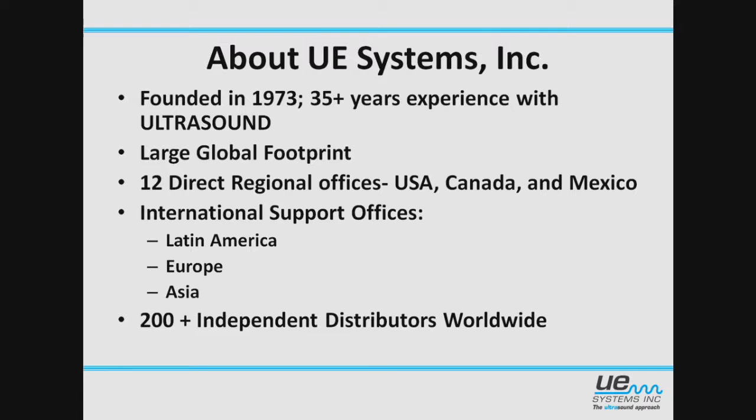A little bit about UE Systems first. We were founded back in 1973. We've got 35 years of experience with ultrasound, one of the tools we're going to go through today in testing steam traps. We've got a really large global footprint with 12 direct offices and about 200 independent distribution points around the world, so no matter where you're at, we can probably get out and help you with whatever it is you need.

A little bit about Swagelok Energy Advisors. They do engineering services, steam system audits, some project management, and they also offer an entire host of training programs.

What are we going to cover today? We're going to go through why steam, what are steam traps, what do they do, why do we even need to test them, and then how do we test them. That's the meat of it for today.

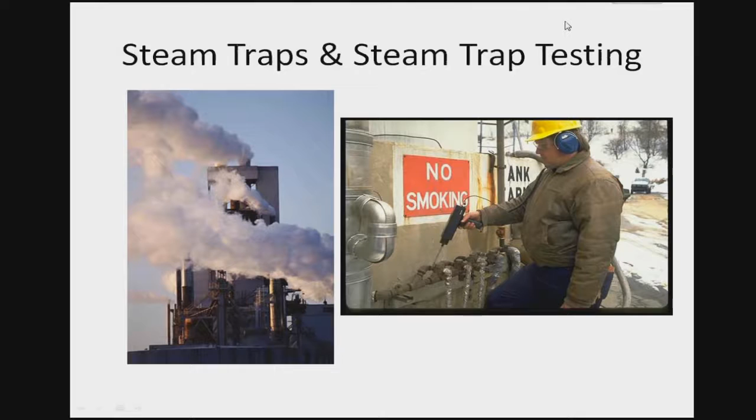So the first thing we want to focus on is why are we using steam traps in the first place. Well, steam traps have three main functions. The primary function is to remove condensate as quickly as it forms, and the second function is to prevent live steam loss. The third function of a steam trap, and it's kind of a tertiary function, not the main function, but it has to be able to do this, is remove air from the system.

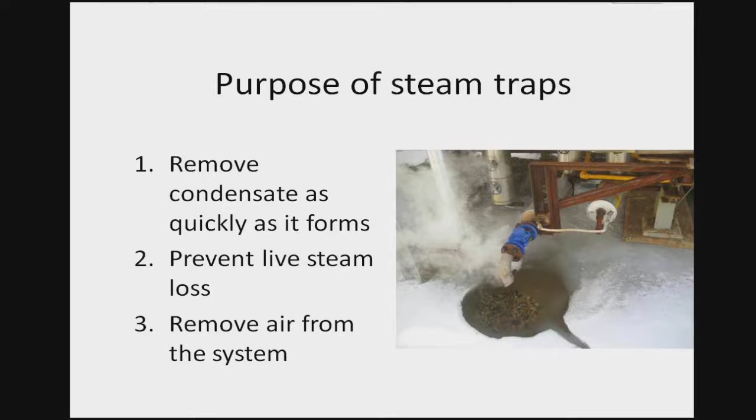We want to make sure we've got other devices in the system to get air out as quickly as it forms, but steam traps have to be able to do that as well. So when we're talking about the steam trap itself, the three basic functions I mentioned: vent gases or non-condensables. The non-condensable gas is air that occurs during shutdown of the system when the vacuum's pulled, or as the boiler makeup water discharges gases into the system. We have to do that in order to improve the efficiency of the system.

Gases in the system other than steam are going to reduce pressure and ultimately reduce temperature, so we don't have as efficient a system running. If we don't discharge condensate, we can back condensate up in the system. It's going to affect heat transfer equipment and may also result in water hammer.

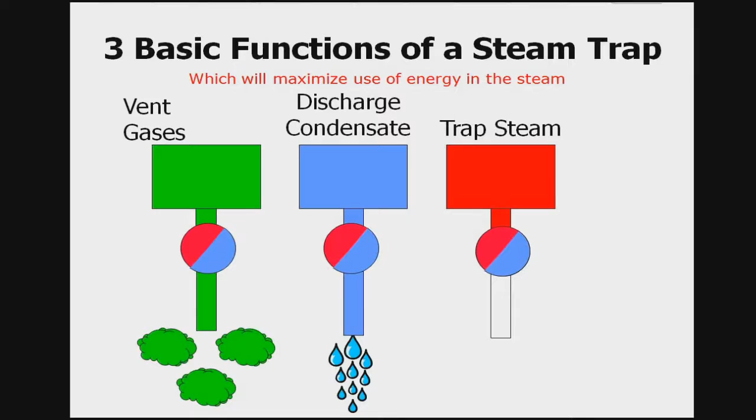And then the last thing that we want steam traps to be able to do is trap steam. If we just have the line open, the steam trap's blowing through, then the steam doesn't stay in contact with the heat transfer equipment long enough to give up its latent energy. In a steam system, it's the latent energy that does all the work. That's basically the energy required for the liquid to change state from liquid to gas, and that's a large component of the energy in steam, and that's what makes it so efficient. So if we don't trap that steam and give it time to give up that latent energy, all we're basically getting out of the steam is the heat energy out of it.

Okay, why are we testing the steam traps on a regular basis? Well, we have to maximize the production rates and quality.

In today's economic environment, if we are not running full out as best as we can and as efficiently as possible, somebody else down the street is going to be doing that, and if they can do it more efficiently, then it's obviously bad news for our facilities. We have to maintain safety.

I'm up here in the north part of the world, up in Canada, and we're coming into our winter season. If we get steam traps that are blowing through and dumping to the ground, anytime after mid-October we start seeing a lot of steam. As the steam comes out, it starts to create icing issues. It can also create fog clouds as we're coming through, and obviously steam discharging in a facility is going to create problems.

Whenever I go out and do training courses, Die Hard seems to be on the hotel movies. And you think back to Die Hard, most of the scenes in the industrial facilities, all you see is steam leaks coming out. That's kind of the standard view most people have of steam systems, is leaks. And it's unfortunate, and it's not safe. Walking through a cloud of steam can obviously be very, very dangerous.

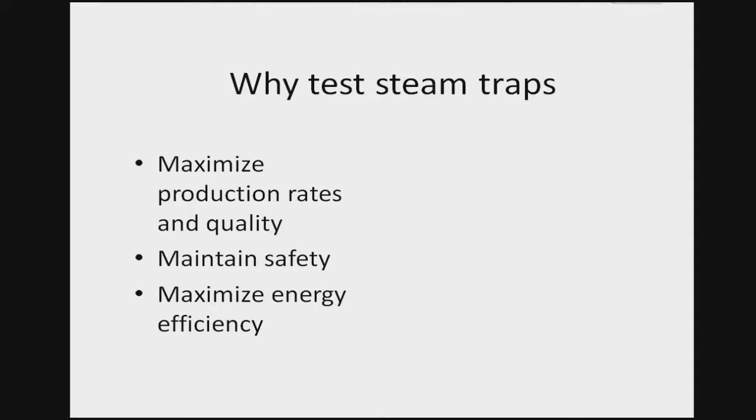And then maximize energy efficiency. That's going to be a big one as well. If we are putting extra BTUs into that boiler to produce steam that's just warming up the ducks as they fly by, then again, we're obviously not being as efficient as we possibly can be. We're wasting money and having issues there.

10 years ago, Fortune magazine came out, and this was when steam costs were very, very low. We're talking like $2 per 1,000 pounds. Nowadays, we're seeing prices typically in the $10 to $15 per 1,000 pounds for steam. Fortune magazine reported that a DuPont facility saved over $1 million a year just by testing and repairing defective steam traps.

We talk about the amount of steam that can come through one of these traps, and it's a huge amount. And if the dollar figure doesn't kick something in, or you're saying, well, we're just burning waste fuel, the other side we have to think about these days is the emissions. There's huge numbers of emissions coming through in the CO2 and NOx side of things if we aren't checking these traps and making sure our steam system is running as efficiently as possible.

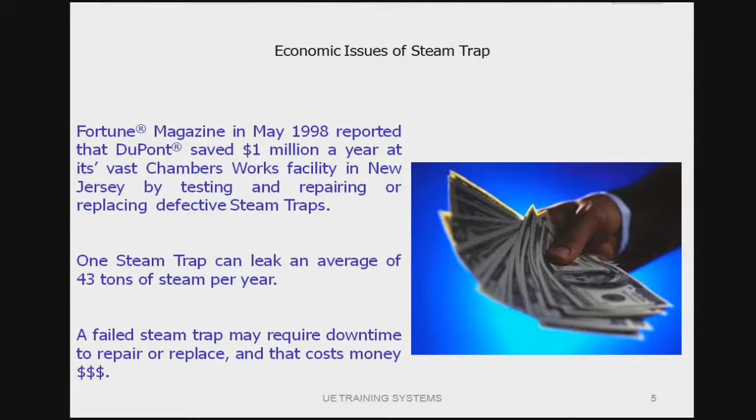So again, why implement a regular trap survey? Well, safety is going to be the primary driver. Improve the process efficiency by effectively removing the condensate.

If we have a slow startup, or if we're allowing condensate to build up on our heat transfer equipment, we're not maximizing our production. We're slowing things down. We're making it tough to control the temperatures of the product that we're running through our exchangers.

We want to maximize the cost and energy savings as well. Obviously, every dollar we can save coming into the boiler that we're spending on fuel, $1 savings on fuel is the equivalent to $10 in sales. So it's a 10-to-1 ratio there. Everything we can save coming into the system is going to improve our bottom line on the outset.

If we test on a regular basis, we're going to reduce trap failures. There's a number of traps that don't react well with back pressure. If we can come in and fix traps proactively, we can help prevent some of the false failures that we may see, just caused by back pressure in the condensate return system.

We can get control of maintenance costs. By being proactive on these systems, a predictive maintenance program is going to be less costly than a reactive maintenance program. We can control our costs, budget things a little bit better, and work our way through the system. We're not worried about downtime and overtime and issues like that.

We can also find sources of previously unrecognized problems. When we come in and look at steam traps, one of the things we really focus on is not just to componentize the system. When doing your steam trap survey, you may find a trap that's failed. If you don't look at the system as a whole and just replace that steam trap with the exact same one, chances are it's going to fail again in the same way. So a steam trap inspection survey gives you an opportunity to look at specific areas where a trap is failing on a regular basis. When we look at steam traps and any component in the steam system, we demand 6 years life expectancy out of it.

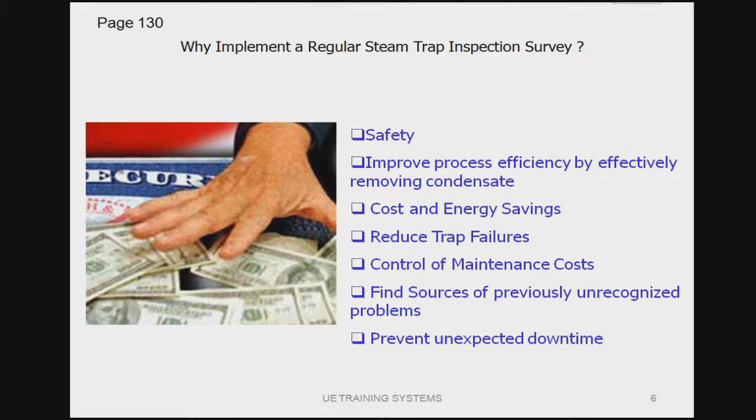As I mentioned before, prevent unexpected downtime. Obviously downtime is a huge cost in the production world. So by being proactive and testing the traps on a regular basis, we may prevent a problem occurring down the line.

One of the big questions we get all the time is, what is the best way to test a steam trap? Ideally, we want to use 3 methods: visual, temperature measurement, and ultrasonic detection. If I only have one tool available, it's generally going to be ultrasonic detection, simply because I can clearly detect the sound of a passing steam trap in a closed piping system. I don't have to open valves, I don't have to break pipe. So if there's not a tool in place to see what's going on, I'm going to use ultrasound.

Temperature gives us some resources, but it doesn't give us a complete picture.

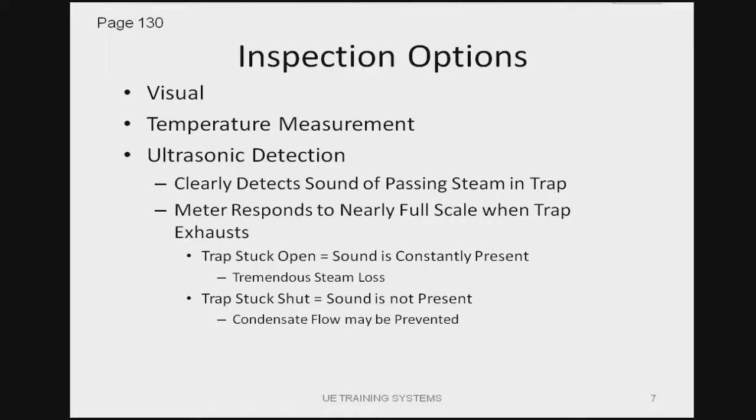When testing steam traps with ultrasound, we're generally going to set our gun up initially at 20 to 25 kilohertz. That's typically a really solid starting point. Depending on your particular system, the background noise, and operating conditions, you may have to tune that in a bit, but if you start at 20 to 25 kilohertz, you'll be at a pretty good starting point. When looking at sensitivity, generally with lower pressure our sensitivity is going to be higher, and with higher pressure we'll go with lower sensitivity. We'll talk a bit about testing methods coming up. My preferred method is a comparative method—I find it gives us the clearest picture possible as we're running through.

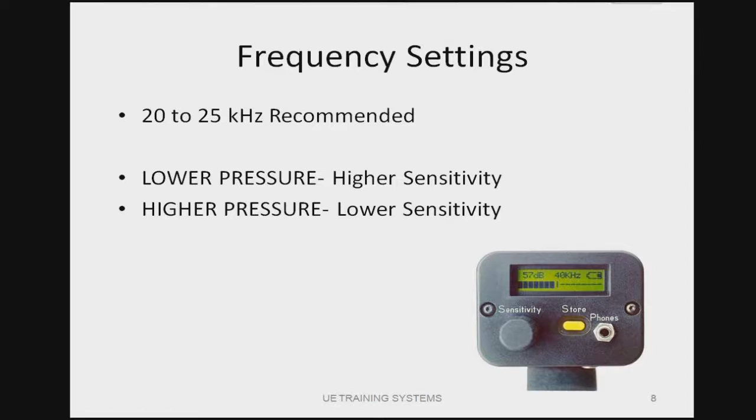So as mentioned, the best way to test is to use all 3 technologies. Test valves give us visual indications, sight glasses in the system, temperature tells us if we're getting live steam to the system, and ultrasound lets us hear what's actually happening in that steam trap.

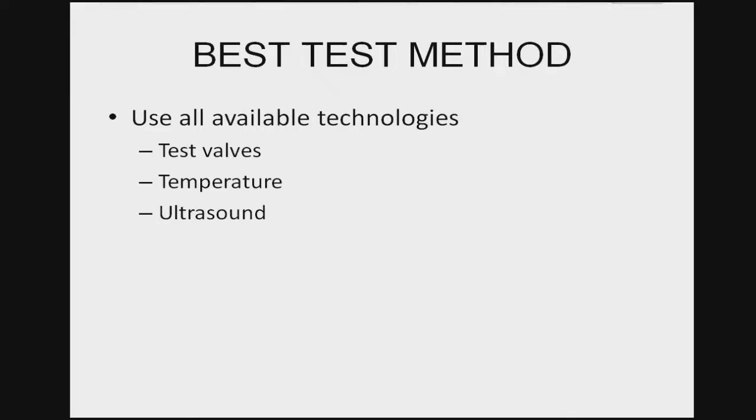What will happen is if that steam trap has failed in the closed position, or is plugged up somewhere along the line, that trap is going to be considerably cooler than the steam pressure or temperature we're expecting. A 100 psi steam system is going to be 338 degrees Fahrenheit. If I come in with the infrared gun and it's telling me my trap temperature is in the 150 degree range, or ambient, then I've plugged the line up somewhere. So it tells me that trap has failed in the closed position.

It won't tell me, though, if that trap has failed open. So if I come in, again in this situation, I'm at 400 degrees here—that's about where the steam pressure is supposed to be, say 150 psi. Looking at the outlet, it's obviously getting a little cooler, call it somewhere in that 300 degree range, so maybe 75 psi.

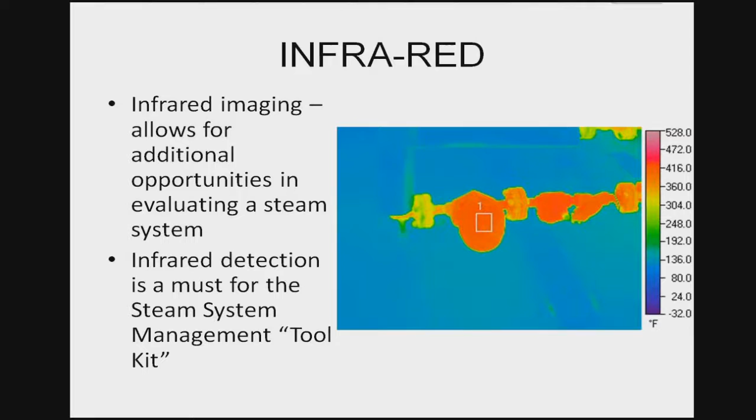So it's very difficult to use infrared or temperature to tell if that trap is blowing through. We're only getting a partial picture by using infrared. It's a very important tool, and we have to use it to make sure we are getting live steam to the system and haven't plugged that trap up. But after we've confirmed that we have live steam coming there, it doesn't tell us the complete picture if that trap has failed in the open position.

When you're looking at these units, make sure you have a good spot-to-distance ratio - basically, that's the optics inside the gun. These guns range in price from around $30, $40, $50 at the local hardware store, right up to $4,000, $5,000, $6,000 for the ultra quality heavy duty industrial ones. The basic difference in price is the quality of the optics.

So if you're 20, 30 feet away, with a 50-to-1 spot-to-distance ratio, for every 50 feet you move away from the object you're testing, you'll have a 1-foot diameter temperature range you're searching for. With lower optics guns, maybe 2-to-1, 3-to-1, 4-to-1, for every 4 feet you move away, you have that 1 foot diameter. So for a smaller steam trap, the tighter that diameter is, the more accurate a picture you're going to get of the actual temperature of that device.

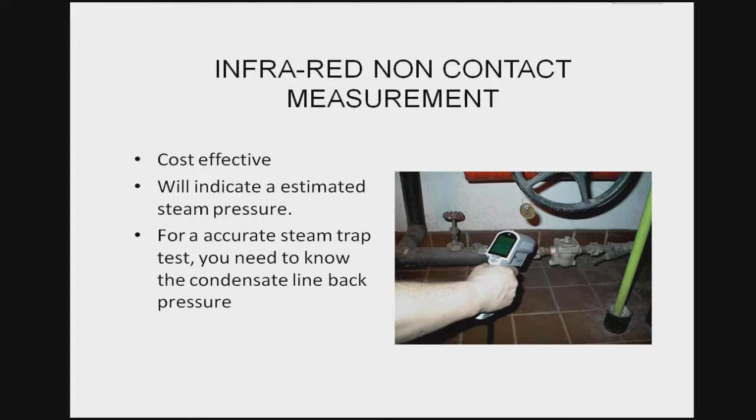One other thing to watch for with these units - if you're in a facility that requires intrinsic safety, basically an area with potential for explosion because of the gases or environment, then you're going to look for an intrinsically safe device. These are available with intrinsic safety. It'll increase the price a little, but an extra couple hundred dollars to make sure you're not blowing your plant up is probably money well spent.

Second thing we're going to do, after confirming we have live steam coming to the steam trap, is actually listen to it using a contact method. With these ultrasound units, you've got the headset on, which eliminates the background noise. Ultrasound units listen to frequencies 20 to 100 kilohertz, above the normal human hearing range.

So the headset eliminates background noise, and we hear what's actually happening inside the piping. With the ultrasound gun we get two indications - we hear what's coming through, and we can also watch the meter. On an analog unit, we watch the needle moving back and forth; on digital, there's a bar graph showing what's going on and the decibel levels. So we can watch both to hear and see what's happening as the trap cycles through.

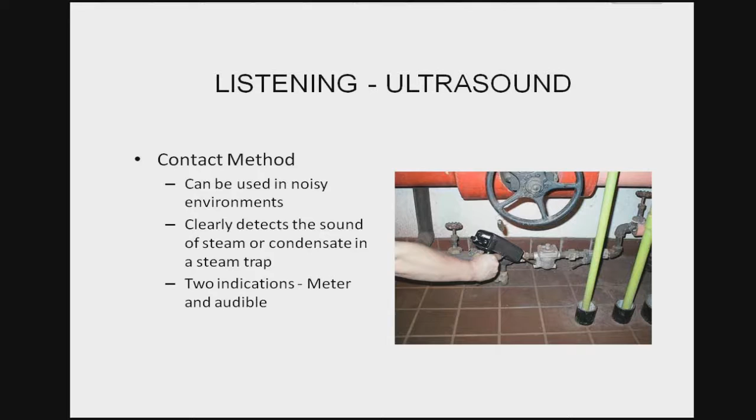When we get into testing, there are two main things we're testing for ultrasonically with steam traps, and two modes of operation. There are different traps, but they all fall into one of these two modes. There's on-off, meaning the trap discharges, closes for a time cycle, then discharges condensate again, closes, discharges - or continuous flow, where we're discharging condensate continuously. Most traps we look at are the on-off style. The only traps we see with continuous discharge are the float and thermostatic traps.

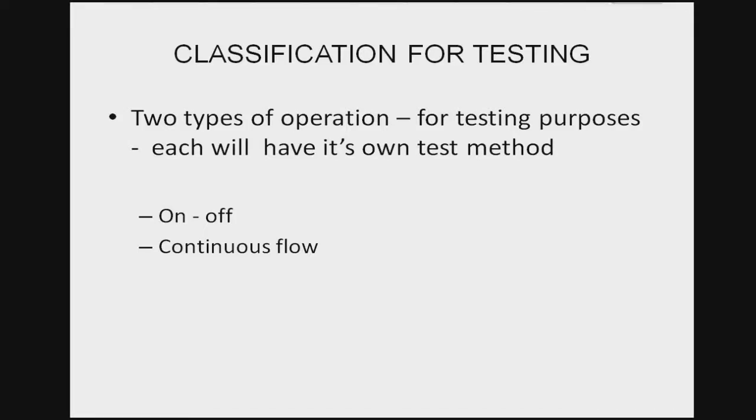There is a flow chart available, I believe on the UE website. I'll run you through quickly how it works and what we're doing when we're testing the traps, then we'll get into the different types of traps, see how they work, and run through a testing process for each type.

We'll start off making sure the steam trap's operating by going back and checking the valves, making sure they're all open. We'll then take the temperature. If the trap is cold or below operating steam temperature, we know it's either plugged or partially plugged, so we can call that trap failed.

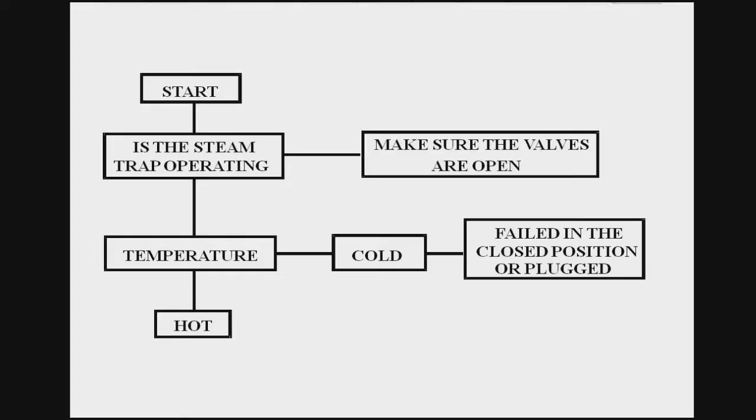We don't really need to listen to it at that point. If we're considerably below the operating temperature or steam pressure, we can call it failed in the closed position. If the trap is hot or close to the steam pressure, we can move on to ultrasonic testing. We'll select the sensitivity for the steam pressure or use the comparative method.

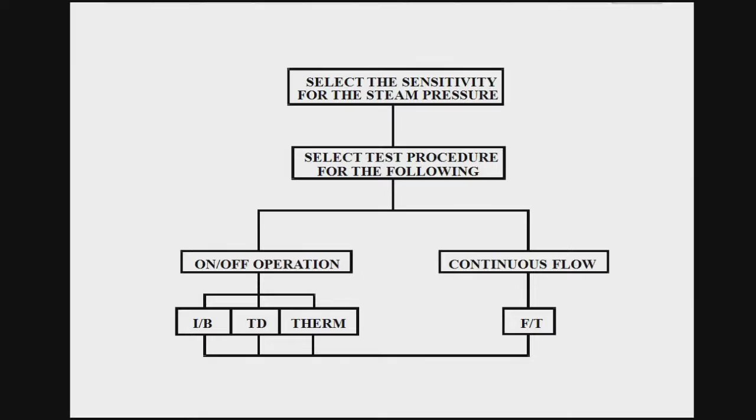We'll talk about selecting the sensitivity in a minute. Then we'll select the test procedure: if it's an on-off trap—an inverted bucket, thermodynamic, or thermostatic trap—we'll listen for on-off operation. If it's a big float and thermostatic trap, or even a smaller float and thermostatic trap, we'll look for more of a continuous flow. We'll listen on the discharge orifice for either an on-off cycle or a continuous flow of condensate through the trap, and record the results.

One big thing to note is the closer we can get to that discharge orifice, the clearer the ultrasonic signature is going to be for that trap. Depending on the type of trap, we've got pictures and cross-sections taken of the different traps, showing roughly where the discharge orifices are on the different styles.

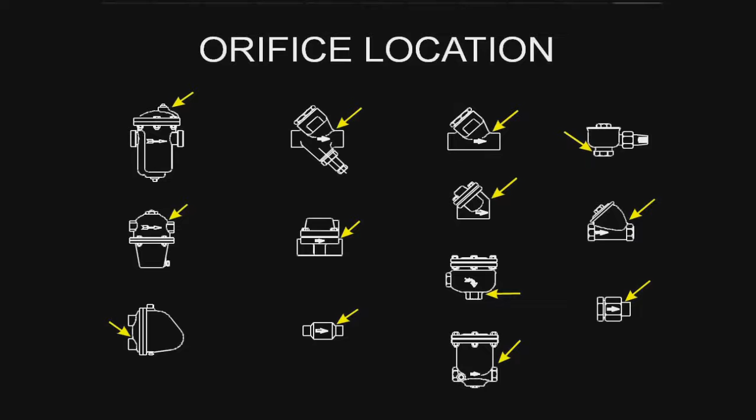If you have questions about the type of trap you're looking at, find the manufacturer's literature. There should be cutaways that give you a clear image of where the discharge orifice is on the traps in your facility. But this is a quick guide for a lot of the standard traps out there.

As I mentioned, my preferred method of testing and setting the baseline is using the comparison method. As you get into different steam systems and pressures, the amount of noise in the lines and piping can be considerable. So what I like to do is come in and get my baseline reading.

I'll test over on the right-hand side where this arrow is, and set my baseline reading at about 10 to 20% of the scale, a lower level on the decibel reading, so I can see what the baseline noise is in the piping. After that, I'll come in and test right at the discharge orifice of that steam trap and watch what's happening there.

After I've done that, if for example this steam trap is blowing through, I should have 20% of scale at this point. At this point, the needle is going to be pegged over to the far right-hand side of the scale, very loud, as that steam is blowing through the orifice and the restriction in the steam trap.

What I can do then, just to verify the noise is coming from the right place—since the point of most ultrasound is typically where the most turbulence is being created—I want to confirm that it's coming from this point rather than something downstream. So I'll also listen downstream of the steam trap and make sure there's not a higher ultrasound level further downstream.

So if I'm testing this steam trap, I get my 20% reading here, come over here and get 100% of scale with a lot of noise blasting through, then come over here and I'm back down to 30-40% of scale—I can tell that this particular point is where the most ultrasonic noise is being created. I can call that trap failed in the open position.

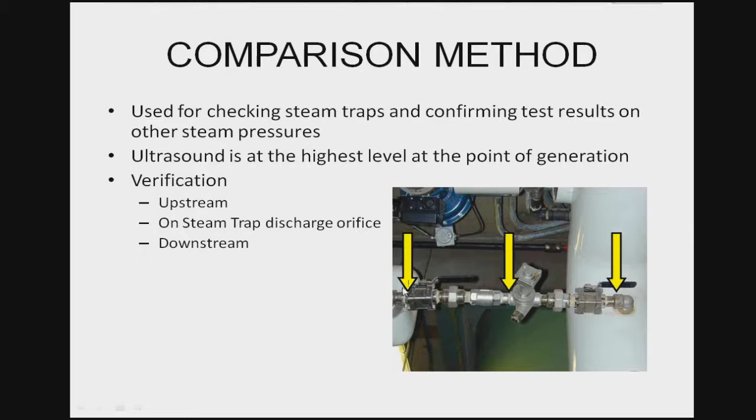If I come in again and test, and I'm at 20% here, I get a high level of sound, I'm at 100%. What I'll do is turn that sound down a bit, or turn the sensitivity down a bit, so it's sitting at maybe 50% of scale. I'll come down and test on the far left-hand side. At that point, instead of being at 50%, it's back up to 80-90% of scale. Then I can understand that the ultrasonic noise or most turbulence is being created further downstream of that line. So I'll keep moving down the line until I find the source of the ultrasound, try to isolate it as best as possible, come back and test that trap to see if it's actually blowing through, or if the ultrasound downstream was giving us a false signal.

Getting into the different types of traps, there's a number of different types we want to look at: inverted bucket, float and thermostatic, thermodynamic, and thermostatic. I mentioned there's two primary operating modes for steam traps. Inverted bucket is an on-off trap, so when we're testing this trap, we're looking for a specific on-off cycle.

The way the trap works - we're showing it here in condensate mode, so we're discharging condensate. Condensate flows into the bottom of the bucket, and as an inverted bucket, there's an inverted bucket inside there. The way this trap works is the weight of the bucket will overcome the closing force, and it's a differential pressure occurring through this orifice that closes the trap. There's the valve stem, valve seat. As the condensate comes in and fills up, the weight of the bucket will cause it to drop down, open that valve, and allow the condensate to discharge.

When it's discharging, we should see that needle pegged to the right side, and we'll hear a fairly loud noise coming through there. As live steam comes in, it starts to fill that bucket up, and the bucket becomes more buoyant. As it becomes more buoyant, it starts to lift up, and as it lifts, the differential pressure between the inlet and outlet will suck that stem into the seat, and that valve will close.

Generally we see these traps cycle at most 2 to 3 times a minute. If it's cycling more than that, we're a little bit inefficient with that particular trap, or maybe a little undersized. So I can run you through a couple of the sounds here. This is a good trap, actually cycling a little faster than 2 to 3 times a minute, but we've sped it up a bit so you can hear that distinct on-off cycle. This is what we're listening for with a good trap - a distinct on-off cycle.

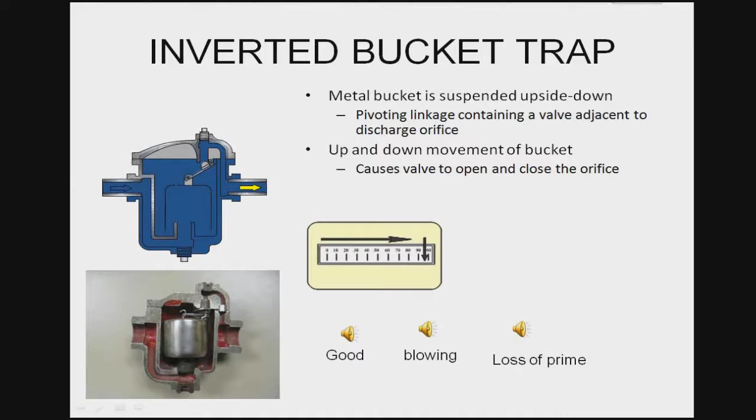The way that you check to make sure the trap hasn't failed is we'll shut a valve on the downstream side for a couple of minutes, letting the condensate build up inside that steam trap. Then when we discharge the bucket, the condensate can blow through, and the steam will start coming back in again, allowing the buoyancy in there to lift that bucket back up, and hopefully that gets the trap working again. If the trap's still blowing through at that point, we can classify it as a failed trap and move on to the next one we're testing.

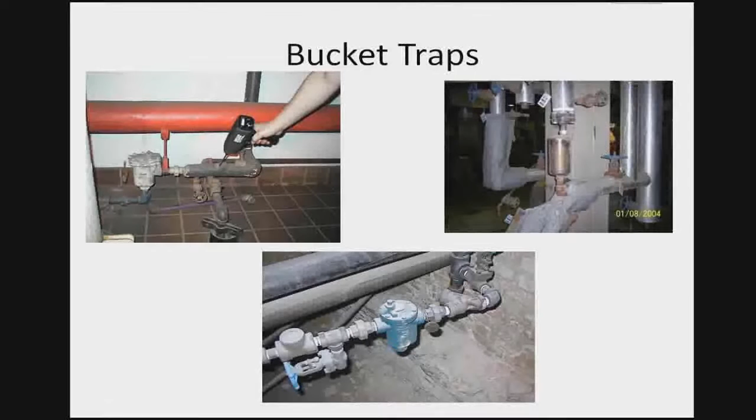The next type of trap we're going to look at is the float and thermostatic. As the name implies, there's two pieces in it: a thermostatic element and a float element, and we need to test both when we're testing the steam trap. For classification, there's two modes: steam traps are either on-off operation or continuous flow. Float and thermostatic is the only continuous flow trap that we typically test.

For process applications, this is our preferred steam trap, simply because we're continuously removing condensate away from our heat transfer equipment. That makes the heat transfer process a lot more efficient than an on-off trap, which can typically back condensate up onto some of our heat transfer equipment and decrease the efficiency of that heat exchanger.

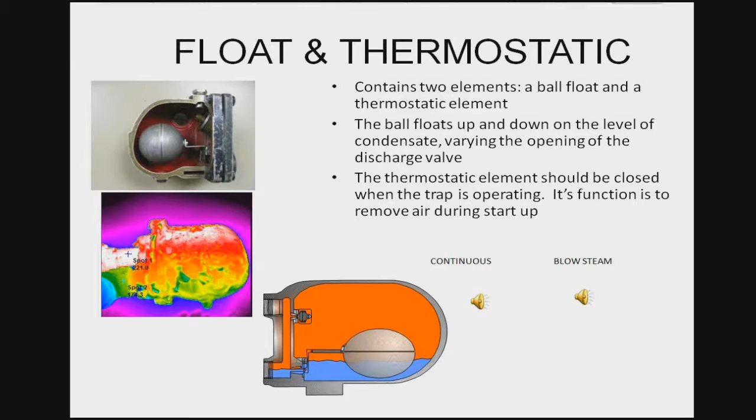Okay, so testing, again, tested it in two places. Mentioned earlier, we want to see that needle sort of moving back and forth nice and gently in this area. If it has failed in the open position, it's going to peg. If the thermostatic element at B here has failed in the open position, it will be higher than we're seeing at point A if point A is working properly.

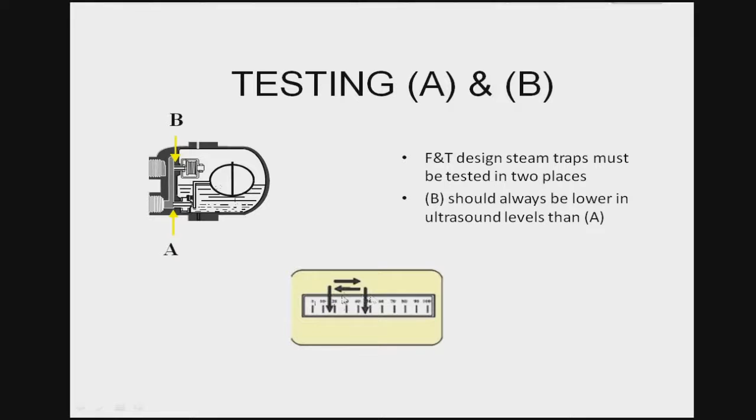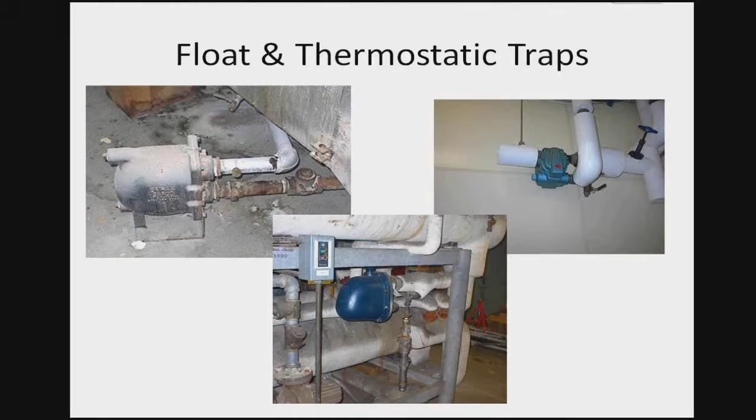Okay, and a couple of pictures of the float and thermostatic traps. Again, typically characterized by piping coming in and out on the same side. Your inlet piping is generally going to be on the top. Your outlet piping is generally going to be on the bottom. There are configurations like the one in the top right-hand corner there, which will allow you to bring piping in one side and out the other. Just depends on the type of trap you're dealing with. Okay, so that's the float and thermostatic trap.

So at startup, it's allowing the condensate to discharge, or when there's a large amount of condensate backed up in the system, it's going to allow the condensate to pass through. As the steam pressure or temperature increases, the liquid inside there is going to eventually expand, overcome the force that's working on the bellows, and drive that valve stem into the seat, closing it off. So again, it's an on-off trap. Instead of continuous flow, this is an on-off trap, so that's what we should be listening for when it starts.

So what we'll look for, we'll get our baseline reading, be down maybe 10-20% of scale. When that trap discharges, it'll bring that needle and peg it all the way over to the right. We'll hear the discharge for a few seconds, then it should stop. So this is what we're listening for.

So again, a distinct on-off cycle. These traps can take a while to cycle depending on the design, and if it's the bimetal one, you're subcooling the condensate maybe as much as 60, 70, 80 degrees. Depends on how the trap is set up. So the cycle can be a little bit longer than the one we just heard. Generally, you're going to hear that trap cycle, once every 20, 30, 40 seconds, somewhere in that kind of range. Just depends on the load that it's handling.

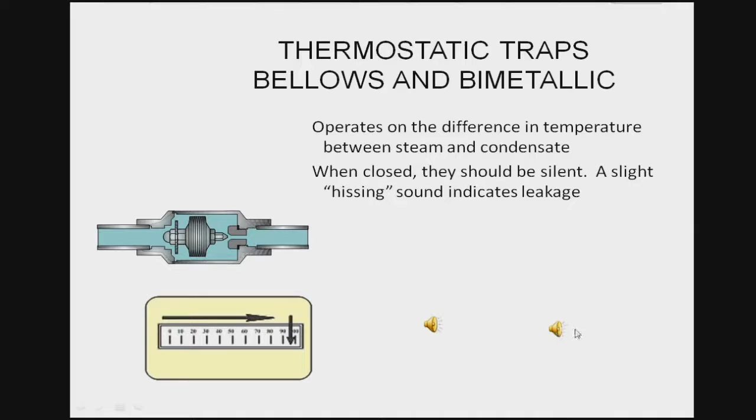So that was just a continuous discharging sound. There wasn't any modulation, no on-off cycling. It was just a straight blow-through, and that's what we're listening for there.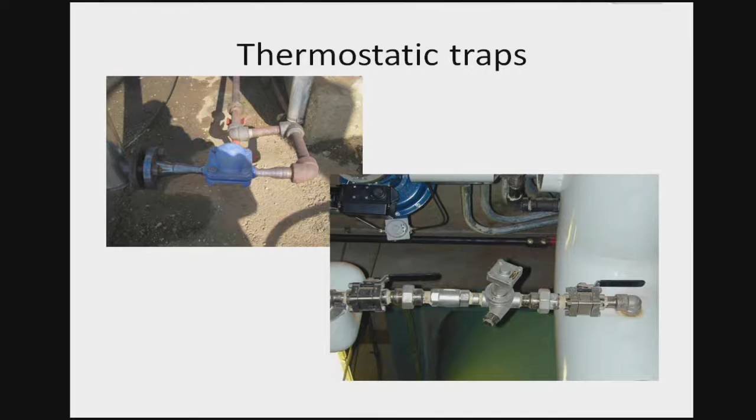Last type of trap we'll talk about is the disc, and basically the way the disc works is based on Bernoulli's principle. If we've got any pilots listening, Bernoulli's principle is the theory that keeps the plane in the air, which basically states a gas moving at a higher velocity has a lower pressure. So the plane, because of its curved wing, has a lower pressure on top, which actually sucks the plane into the air.

And as it radiates off to atmosphere, that steam eventually condenses down. When the steam condenses down, it reduces in volume by about 1,600 times. When it reduces in volume that much, the pressure in the main line will overcome the closing force of the disc, allowing it to pop open and allowing the condensate that's built up to pass through, and then the cycle repeats. As soon as that condensate passes through, the steam comes in, the velocity increases, the pressure drops, and sucks that disc back down.

So these traps will typically cycle fairly frequently. You're going to see them cycling 3, 4, 5 times a minute. If they're cycling more frequently than that, they can become a fairly high energy consumer. We call that condition machine gunning or motor boating. We may want to think about changing that trap at that point, just from an energy efficiency standpoint.

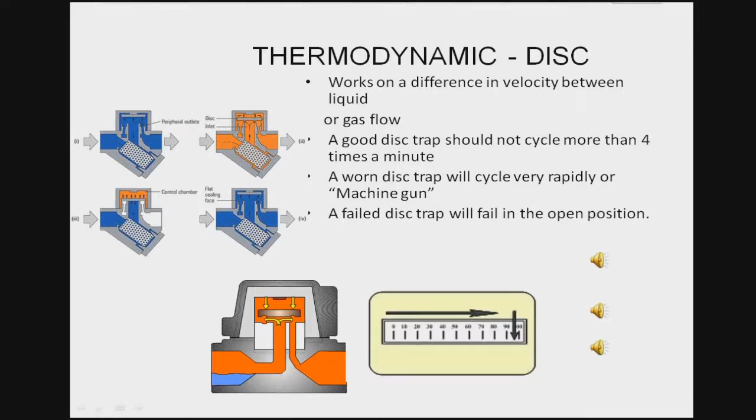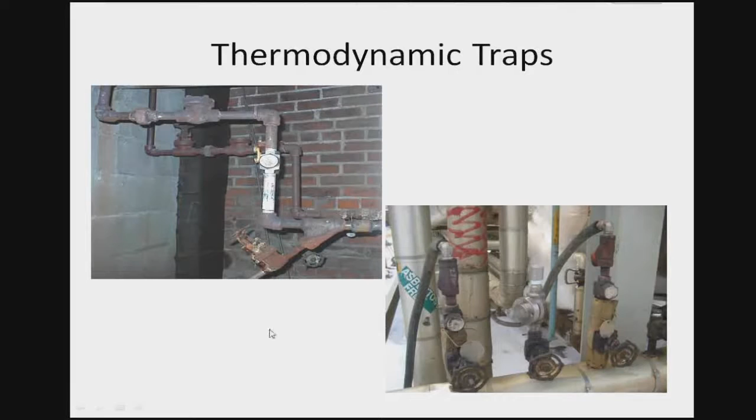Installation with these traps - they can be installed in almost any orientation. In the picture top left, you can see the trap installed vertically. On the right-hand side, we've got three disc traps. There's one here, and this third one is also a disc trap, but mounted on a universal mounting device. So those are the disc traps.

For a quick reference: the disc trap is going to be hold, discharge, hold for some cycle, so an on-off cycle is normal mode. If it's failed, we're either going to hear very rapid cycling or blow-through coming through. For the inverted bucket, also an on-off trap, so hold, discharge, hold. If it's failed open, we're going to hear dribbling, jackhammering, or just a whistle as it blows straight through. Thermostatic could be the bimetal or the balance pressure bellows.

If it's failed in the open position, a loud continuous sound. If we're under very, very low load, under low pressure, or at startup, we're going to hear a bit of a steady modulating sound until it gets caught up.

So at startup, we may not get a completely true picture of what's happening in there. But as a general rule, these traps are going to be a hold, discharge, hold, or on-off operation. A thermostatic trap is going to be a continuous discharge, so I should see a steady modulating sound.

If we hear a much higher ultrasonic signature or whistling sound, that's telling us the trap has failed in the open position. There's one more device listed there.

It's called the orifice. We typically don't refer to that as a steam trap. A steam trap is an automatic valve that senses the difference between a liquid and a vapor, allowing the condensate to pass through while holding the vapor or steam on the system.

An orifice doesn't do that. It's basically just a small hole drilled into a pipe union or an orifice device.

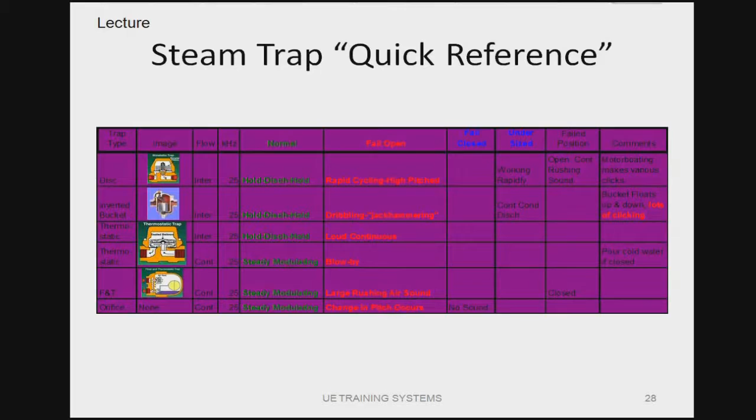Okay, so that's kind of just a quick reference available for him. When we get into the testing equipment, there's a number of different options. With the ultrasound units, can be the digital models, the analog models. The nice thing we found with the digital models is the data logging capability that they have.

It certainly helps capture some of the sound files as well, so we can do a comparative test if you have somebody new coming out with you testing the traps.

And you know, trap number 125 has this particular signature. When you come back, you can do a comparison to it to make sure you're still getting that same sort of signature, that same kind of sound.

If there's something different, then it gives you an opportunity to do a little bit more investigation to find out what's going on. When we're testing the traps as well, with the ultrasound, obviously we want to be using that stethoscope module.

We're going to be on the 20-25 kilohertz range, and we're going to have the unit set to log, to get our real-time reading of what's going on inside that trap.

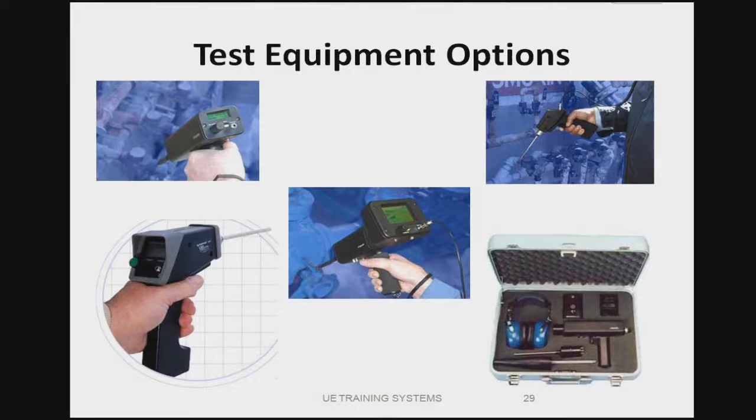Some other considerations as we come towards the end of this. One of the big things we really emphasize is document and record the results.

If you just go out there and test your traps and you just kind of put a bit of red flagging tape, or whatever you're putting on the trap to indicate it's failed, and you don't document and record your results, you're missing a really good opportunity to find out what's going on in your steam system.

I mentioned a bit earlier about looking at the system as a whole and not just blaming the steam trap. Steam traps are notorious in the steam world for taking the brunt of the blame. The reason being, it's a $200, $300 device typically.

And it's much easier to blame that $200, $300 steam trap than it is to look at the whole steam system and say, well, actually we've got a bigger problem with our piping, but it's going to cost me 10 grand to fix that. I'm going to blame this $200, $300 steam trap.

So if we're not documenting and recording our results, we're not going to find out where the trends are. We're not going to see that trap number 125 is failing every other month, and we need to look at actually why that's happening. So that's one of the big things we do emphasize: document and record your results.

Don't componentize the system. Look at the whole installation. I kind of touched upon that here just a second ago. The steam trap is a device that is going to fail after a while.

We demand 6 years performance from any steam component, including the steam trap. If you're not seeing that, you need to take a look at why you're not seeing that. It may be that you're not selecting the correct components in there. You're buying a steam trap based strictly on price.

Steam traps are like anything else out there. You can get something that has a 1-year warranty, or you can get something that has a 2, 3, 6-year warranty. It just depends on the manufacturer. Something that's going to give you a 6-year warranty is probably going to be better quality than something that gives you a 1-year warranty. And if it's better quality, you're probably going to pay a bit more for it. So there's the balancing act that you need to consider as you're running through there.

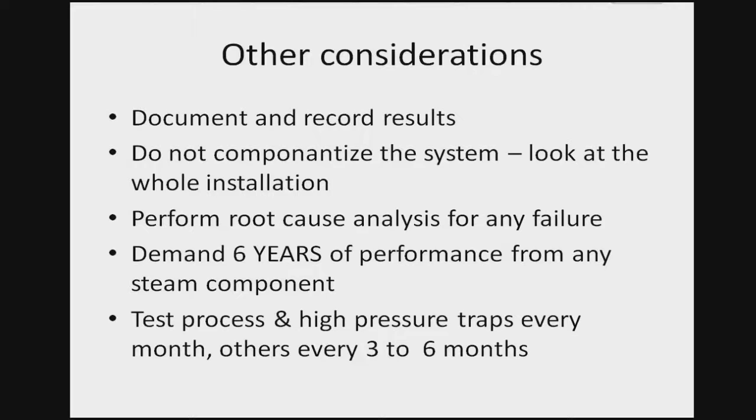From the testing frequency standpoint, we want to test process and high-pressure traps every month, and then every other trap out there every 3 to 6 months. Tracing traps, or unit heaters if you're bringing them up once a year, test them at the beginning and the end of the season to make sure that they're working properly.

Why are we testing this? It's easy to sit here and say we should be testing traps every month or every 6 months, and from a maintenance standpoint we recognize that. But when we go to management and say, hey, I need 2 guys available to go out and test this trap, it becomes a little more difficult to do. There needs to be some kind of economic justification so we can go out and perform this testing. Steam traps are going to cost a lot of money if they fail.

The industry standard says about 10% of your trap population is going to fail on an annual basis. If your trap program is not in place, it's not uncommon to see 50%. We've been into facilities where you go out and test the first 100 traps and see close to 100% failure. You ask them, when was the last time you did a trap test? Well, it was 10, 15 years ago. So at that point, the trap testing is almost an irrelevant procedure to go through.

You're almost better off just replacing all the traps and starting fresh, because you are going to see failure in these things. They're doing an awful lot of work, they're seeing an awful lot of abuse. They are a maintenance item that are out there, so you do need to be willing to repair them, replace them, and test them on a regular basis.

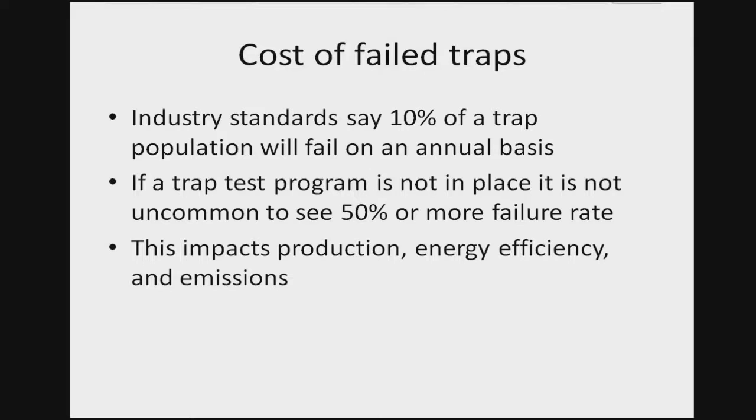If that trap has failed open, in addition to the energy costs we're seeing, we're also going to see production and emissions effects. The trap that's blowing through, we're not leaving the steam on the heat transfer equipment long enough for it to give up its latent energy, so the efficiency of that system has dropped dramatically. And the emissions as well - literally tons of CO2 and NOx are being discharged through these traps failing in the open position. So we can certainly generate reports that show that kind of thing.

DOE has some phenomenal resources for us when it comes to steam systems and testing steam traps. This particular example, the numbers are a little bit older, but we can certainly update them for our own facilities depending on what we're charging or what our steam costs are. This example uses $4.50 per 1,000 pounds - that's a number probably dating back 7, 8, 9 years. I mentioned our steam costs now, for an unloaded cost, just the fuel we're burning to produce the steam, is generally $10 to $15 per 1,000 pounds. So you can take these numbers and double or even triple them fairly quickly.

If we look at a steam trap with a 1/8 inch orifice, running in a steam system at 150 psi, it's telling us we're losing 75.8 pounds per hour. If we multiply that by 8,760 hours per year, and by $4.50 per 1,000 pounds, that trap is costing us about $3,000 a year in lost steam, just dumping to atmosphere and dramatically reducing the efficiency of the system. If we increase those to today's numbers, where we're 2 to 3 times that, then we're obviously looking at $6,000 to $10,000 worth of wasted energy. Nobody can afford that in a production facility where you have a trap population of 1,000 traps.

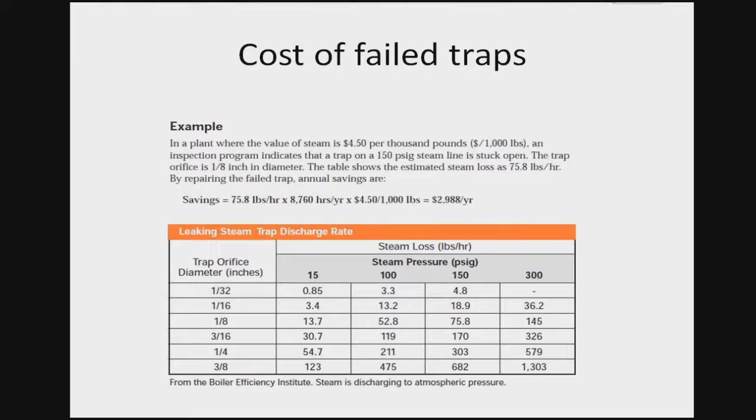You figure 10% failed on an annual basis, multiply that $3,000 by 100, and right there, the trap maintenance program is a very, very cost-effective program, and the payback on it is typically within 2 to 3 months on this kind of system.

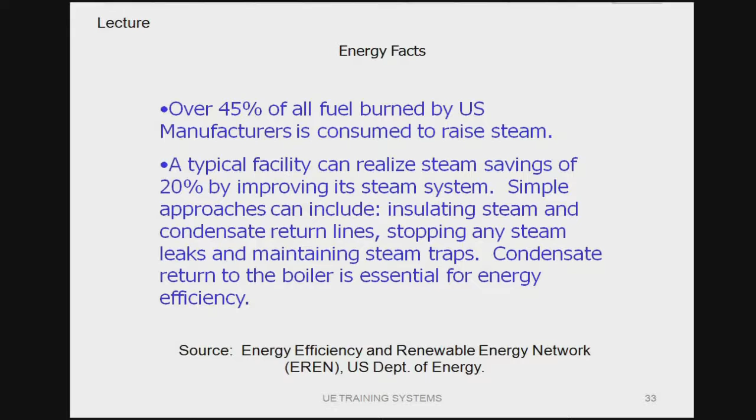A couple of quick energy facts closing out here. Over 45% of the fuel burned in the U.S. is burned to produce steam. A typical facility can realize steam savings of 20% by improving a steam system, and we're talking the low-hanging fruit here. So the low-hanging fruit is testing your steam traps and replacing them, that's probably the easiest thing you can do. The second thing is go around and look for the steam leaks. By doing that, you can dramatically improve the efficiency of your system and realize some significant savings as we go through and work on our steam system.

So a couple other quick impacts on the leaking traps: emissions. If you're not focusing on the CO2 and the NOx and the other greenhouse gases at the moment, wait for it, it's coming. We're seeing it up north here where the government's starting to regulate us on a lot of these things. It's coming down south where people are focusing on CO2 capture, NOx capture, and if you're not maximizing the efficiency of your boiler and the throughput on your steam system, you are producing these gases and they're going straight to atmosphere. So by having a very proactive steam trap maintenance program, you can reduce these numbers dramatically. I would highly recommend getting in and testing the traps on a regular basis.

Okay, so that's it for me. Thank you very much, and I will pass it back to Gary. Thank you all very much, appreciate it. Thank you, Tristan, that was tremendous, the story you're telling us about steam and how to test those steam traps. We really enjoyed that. Let me just get my computer coming back on here, and we're ready to go.